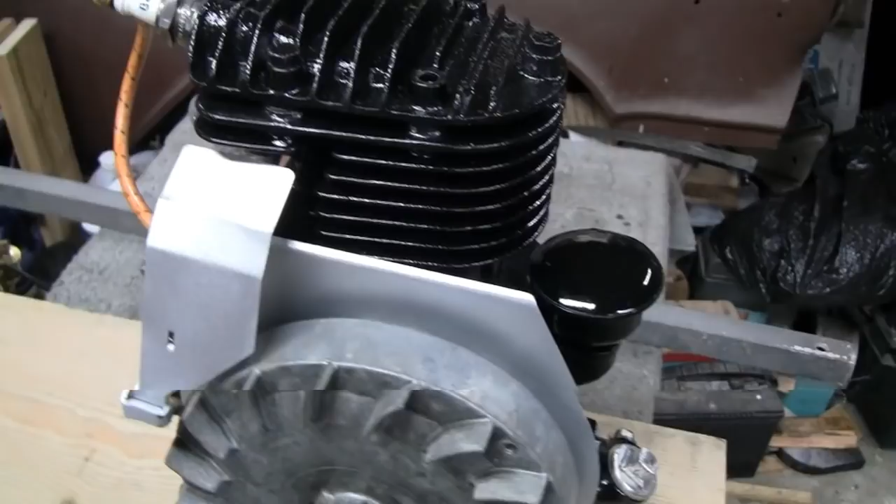Alright, working on the old 1936 Y model Briggs here. Where we left off we had everything together, and we're trying to figure out the Kickstarter. I think we figured out how that works. We'll get into that a little more later.

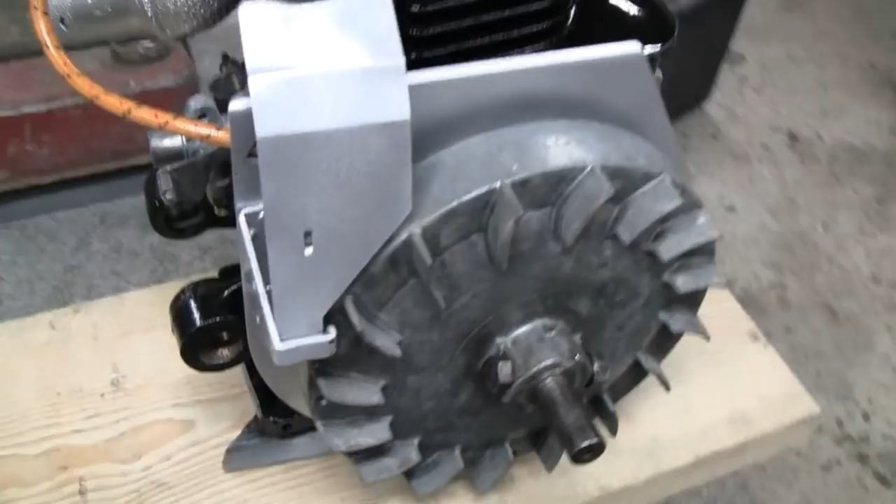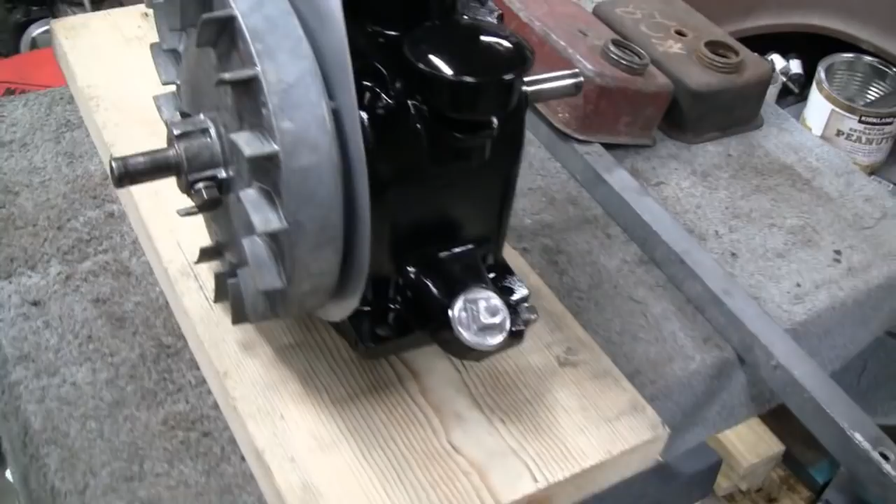Right now I needed to get a board to mount it on, and me and Mike were just on a road trip to Indiana, and one of our friends had some cherry wood. He's gonna give me cherry to put it on, but that just would have been way too nice for this.

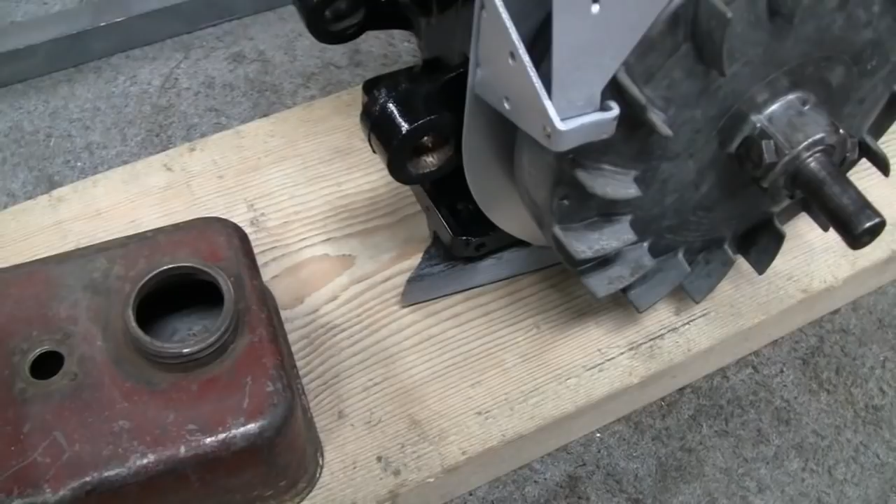But he had this nice piece of pine, so we're gonna mount it on this pine. And we also need a gas tank, and I was able to find this in the shed, but it's pretty rough.

I don't know if you see the bottom here. It's got all kinds of solder, all cobbled up and stuff, so it must have leaked at one time, and I don't know if it still leaks.

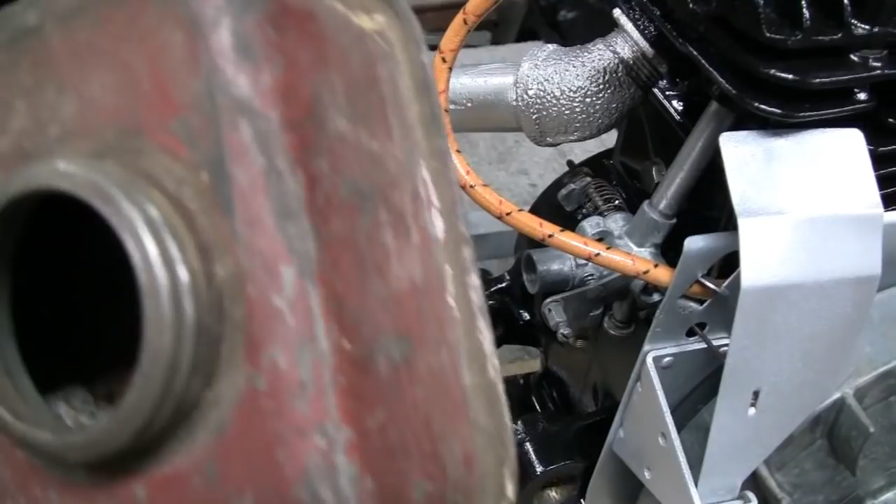It's funny because the inside, let me put the light on here, the inside of this looks pretty good. You see there's no rust at all down around there, except maybe around the edges, and then down here you see a little bit.

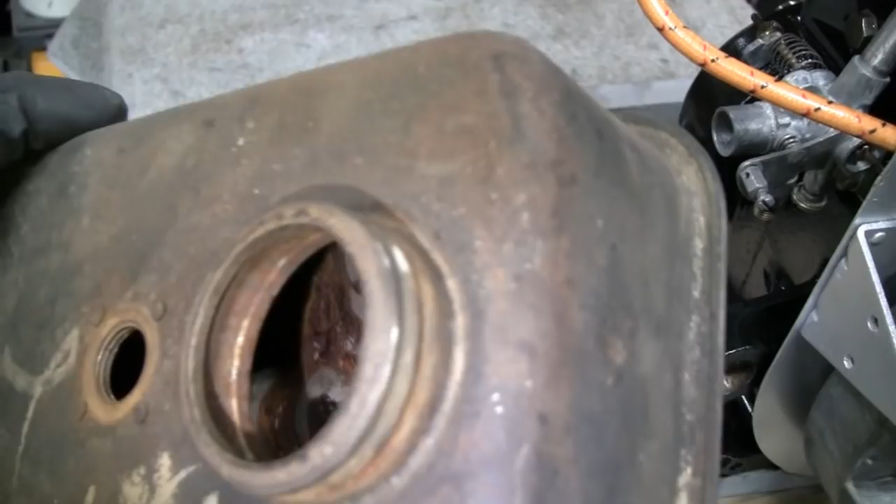I found another one up there too in the loft, and the inside of this one's not bad. I mean, it has rust, but somebody did solder down here and then along the side here. Matter of fact, it looks like they might even braze some of it.

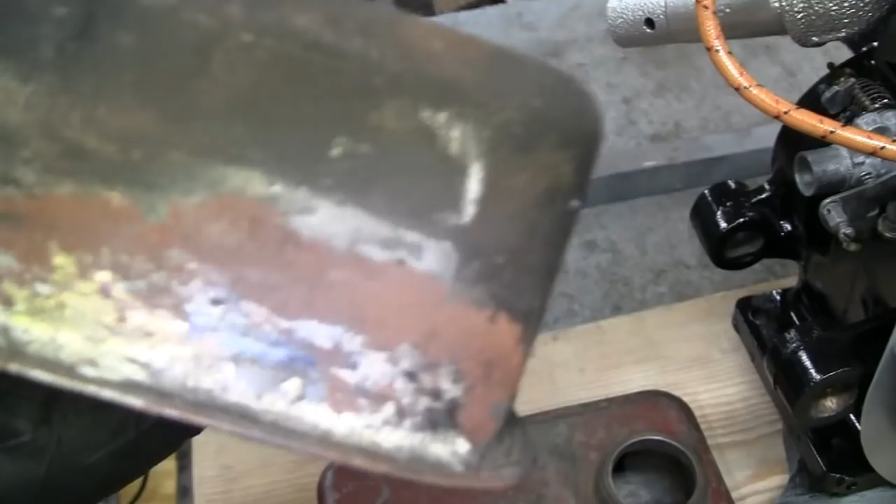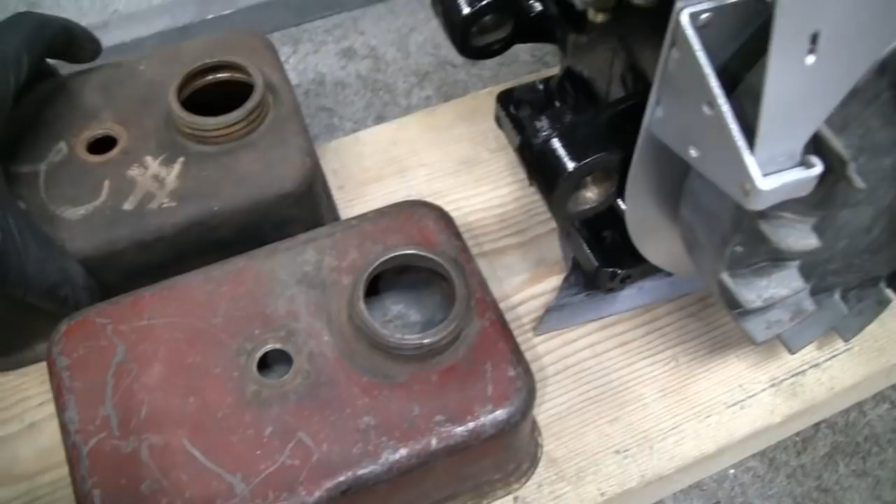So I'm going to see if these leak. If not, you know, whenever I'm at a show, I always, if I see one of these, I'll pick them up, because they're getting scarcer. I'm having trouble finding them.

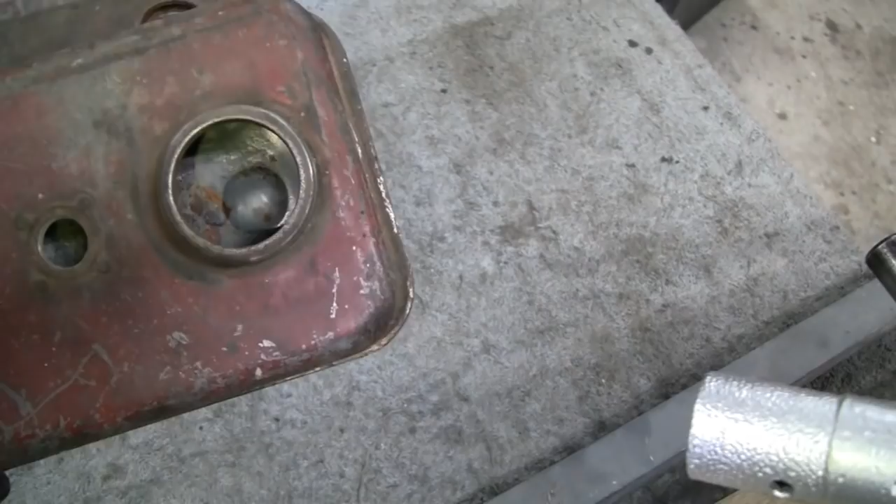You know, you can buy them. Somebody reproduces these, but it's like $70, and then by the time you're done shipping and everything, it's $75, and it just isn't worth it. I mean, half the time you can get the whole engine for 20, 25 bucks.

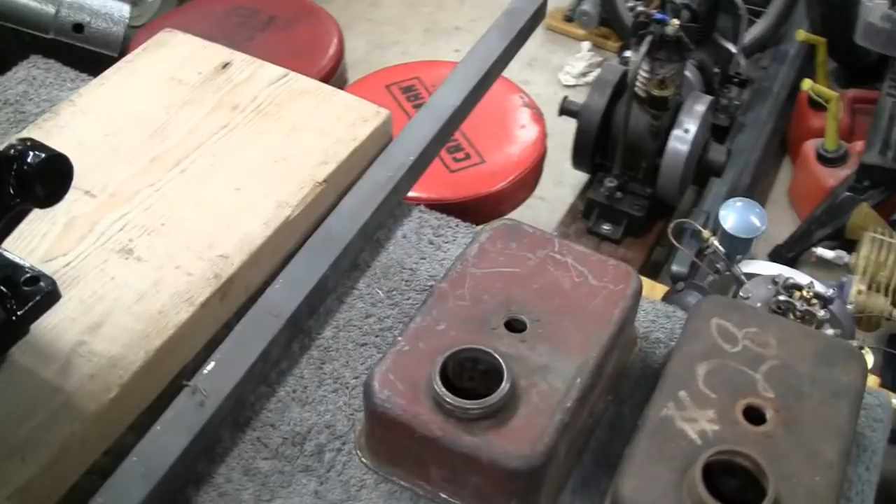The little WMs use these, and WIs, and a lot of the other engines use them. Matter of fact, that one there, we got one on there.

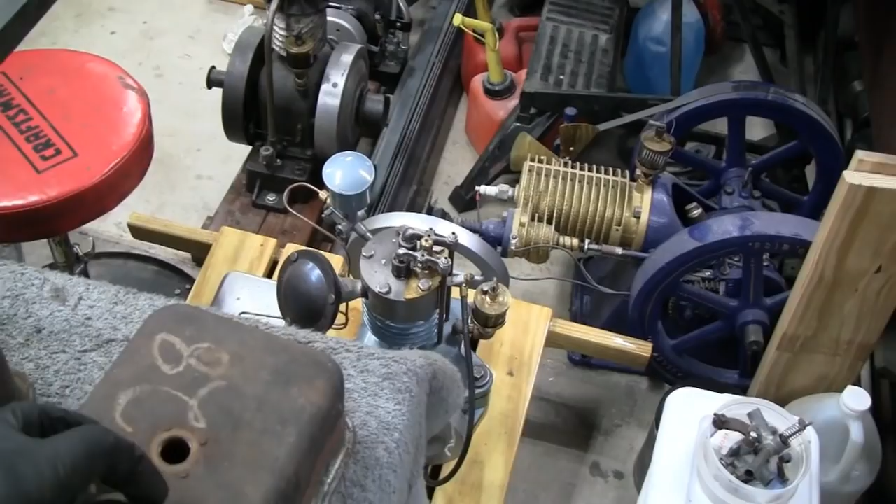Without the shows this year, I haven't been able to find any of these. So if there's anybody out there has this kind of tanks laying around, and they'd like to donate to the cause, get hold of me. Even the check valves, you know, they're tough to find, although they are available.

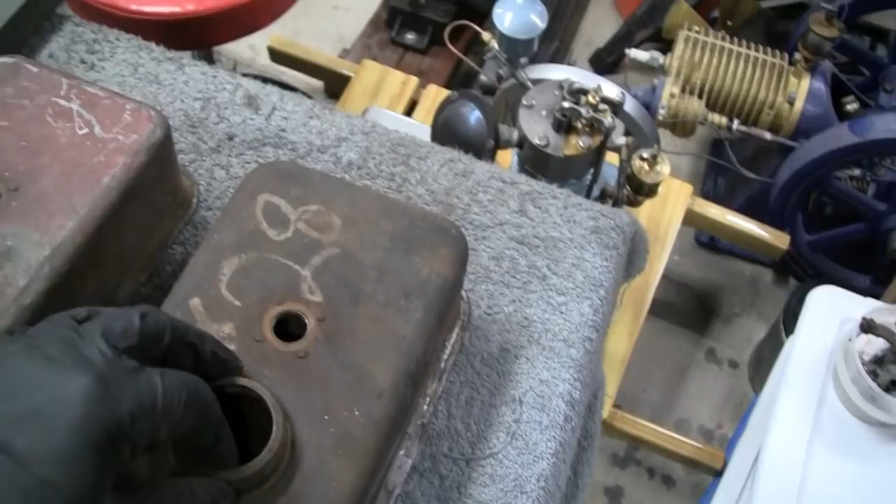But anyway, let's stop talking. Let's put some water in these. I know people say put alcohol in them and stuff like that, but I'm going to put water in them, and if water leaks out, then that means they got a leak. Let me get this off the bench here, and we'll set these up on some paper towels. That way we'll know if anything's coming out of them.

Alright, I filled both of these with water, and surprisingly, I don't see any leaks yet. That's crazy. Got a good bit of water in there too. I don't know if you guys see it, going to the top. Same with this one, so there's a good bit of water in there.

I'm going to let them sit for a while and work on something else, and then come back to this. I don't know how long I'm going to leave it, but hopefully nothing's leaking, and then I won't have to put a bottom in or anything like that.

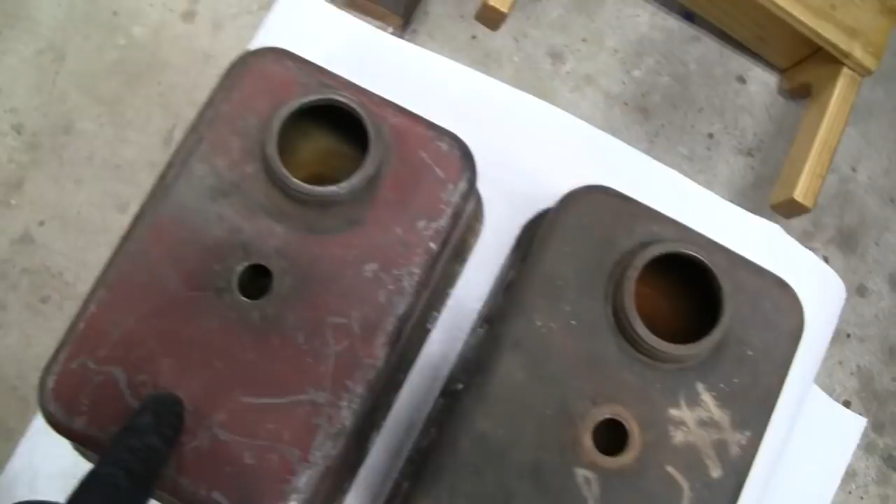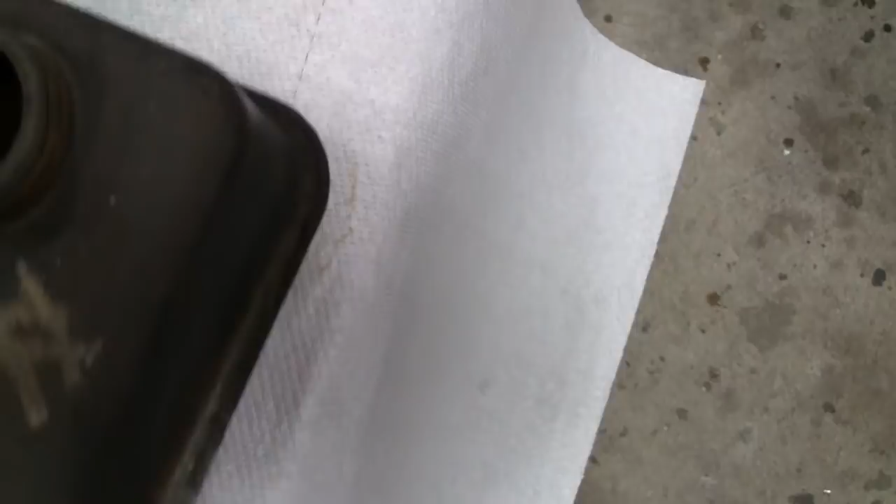And this one here, it actually has a little leak. I don't know if you can see it right there, there's a little stain. And like I say, it's been 3 days, but a leak is a leak. So at least I know I have to fix that one.

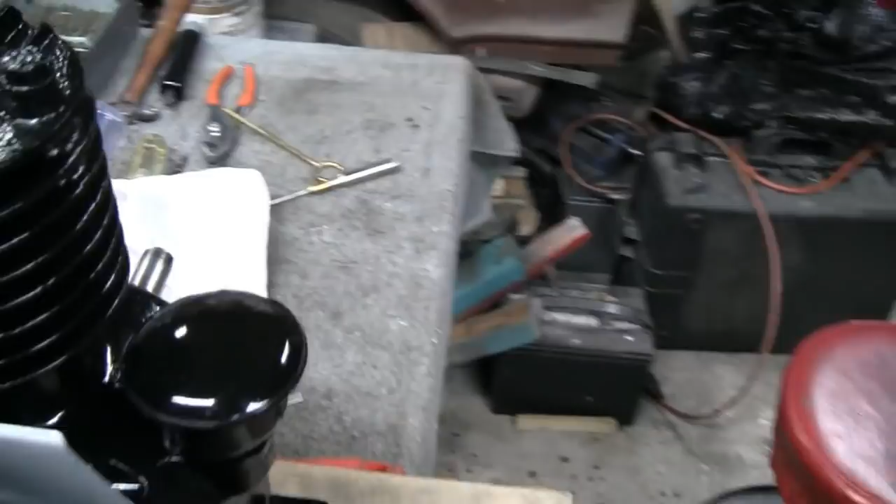For now, I'm going to empty this out and blow it out. I've got a couple hours of daylight left, so I might take it out and paint it. I think I'm going to paint it silver, only because this is going to have so much black—the engine's black, the housing's black—so I might try to paint this, even if it's by brush, just silver to give it a little contrast. So that's what we're going to do, I'm going to take it out and paint it.

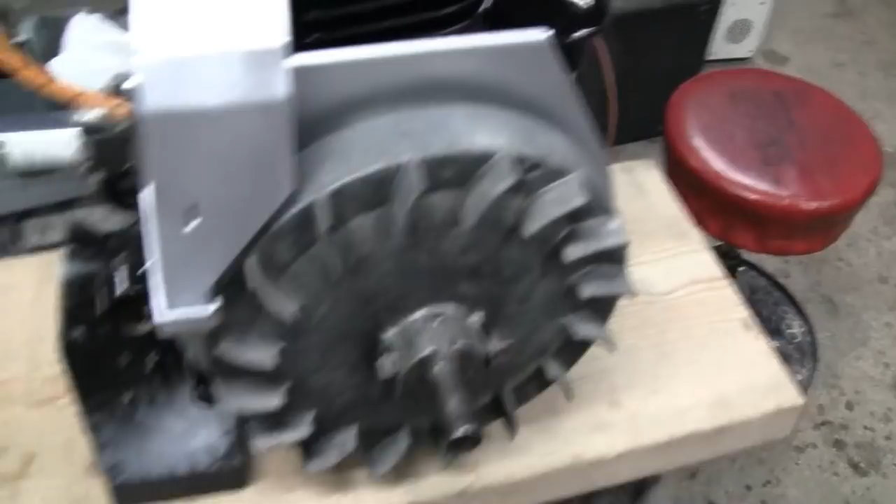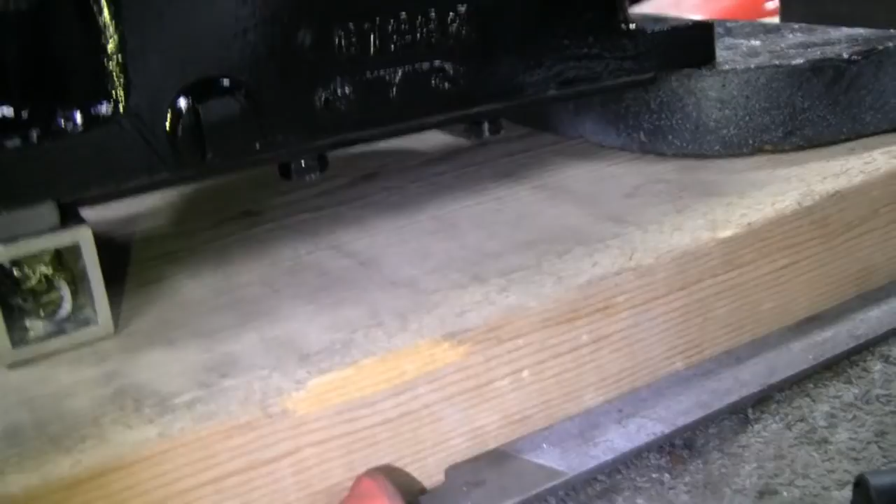Meanwhile, I was working on mounting this on the board. I was going to make a cutout for the shroud, but then it would sit low and I'm thinking it just wouldn't look right. Even when these things came out, they actually had feet that elevated them—they don't sit flat like your normal Briggs. They've got the bolts down here, so what I'm going to do is make this offset. I had some square aluminum and a piece of, I guess, quarter inch—like 3/16 or quarter inch steel.

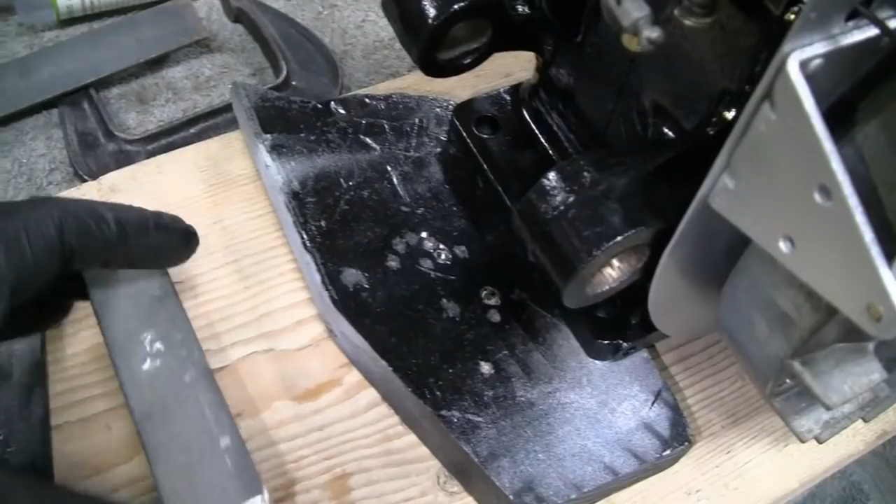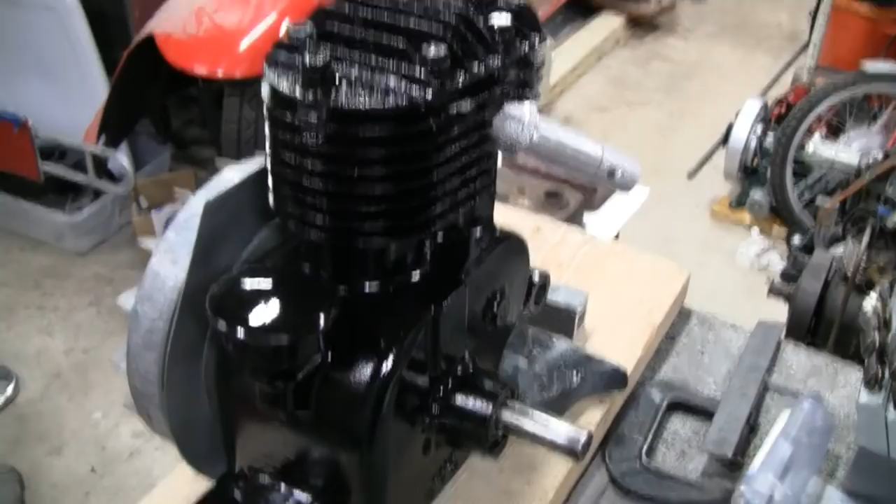That's going to lift this up enough so I can mount and center this, and it'll look okay. I already drilled the holes on one side, and now I have to drill these to quarter inch. This looks like maybe a 1 inch square aluminum block, and I think I might take the paint off of that and keep the aluminum—that'll give this a little more silver. So that's what I'm going to do, and we'll see when I get back. And then we have a little something to talk about.

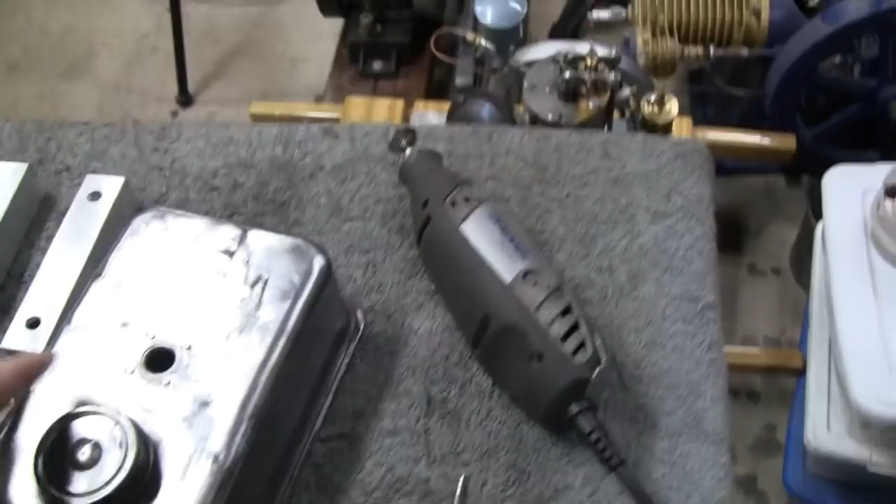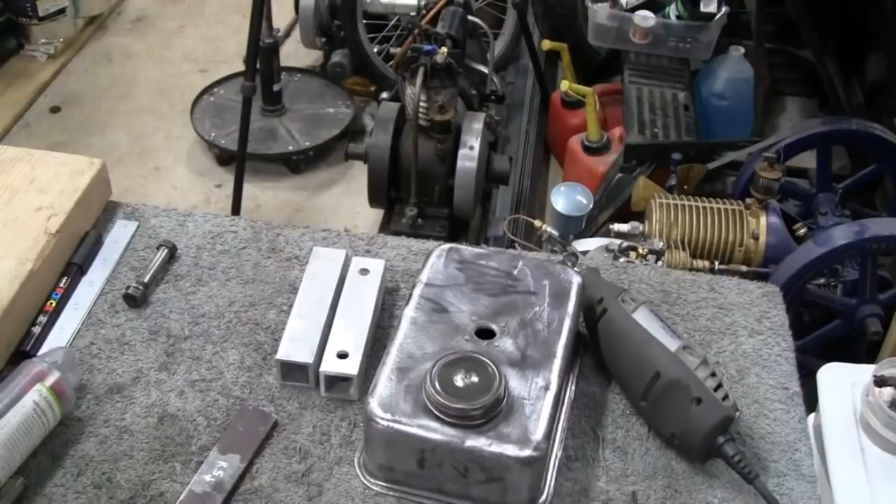Alright, yeah, I never did get outside to paint this. It took me a little longer than I thought to clean it up—I wanted to wire wheel that, clean them up, so it took a little longer. It's just one of those things. Right now it's dark out, so we'll get to that tomorrow.

There's no problem, but I came across something interesting. I'm going to point it out to you guys, but let me take this flywheel off and I'll show you. I think you'll like it. Let me clean this bench off here first, and then I'll show you.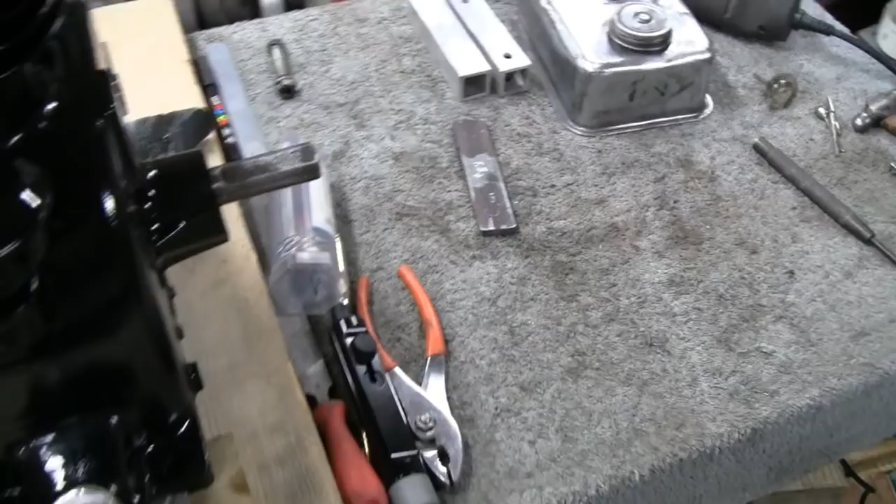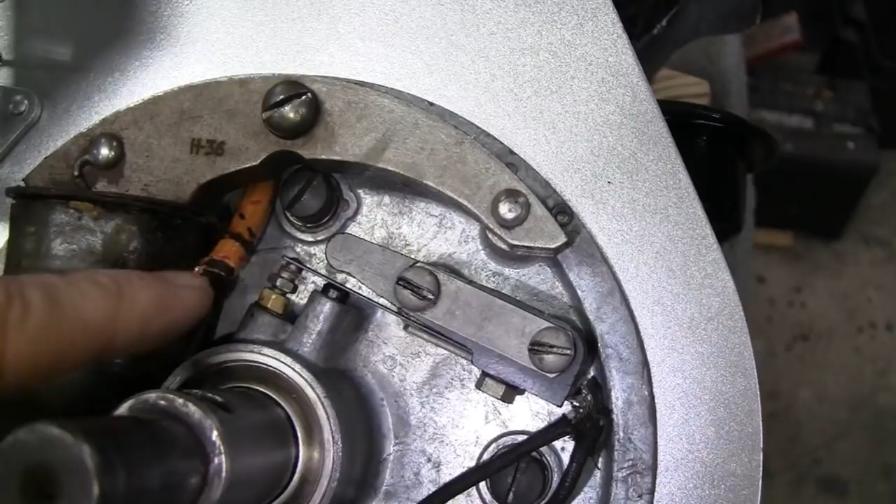Alright, I took the flywheel off there, and if you guys remember when we first took this engine apart—put the light on here, that might help—there you go. When we first took this engine apart, you remember, there was tar around this. This is the plug wire coming in, and there was tar around this, and I said I've never seen that before. I also said the wire should be crimped on, and after we took all the tar off, it was actually soldered on.

I said I'm pretty sure it's not supposed to be soldered. I looked into it a little bit, because most of them—I've never seen a Briggs that had the wire soldered on—and I said I'm not sure, I don't think it's supposed to be like that, but to me it looked factory. So I looked into it a little bit, and let me show you what I came up with.

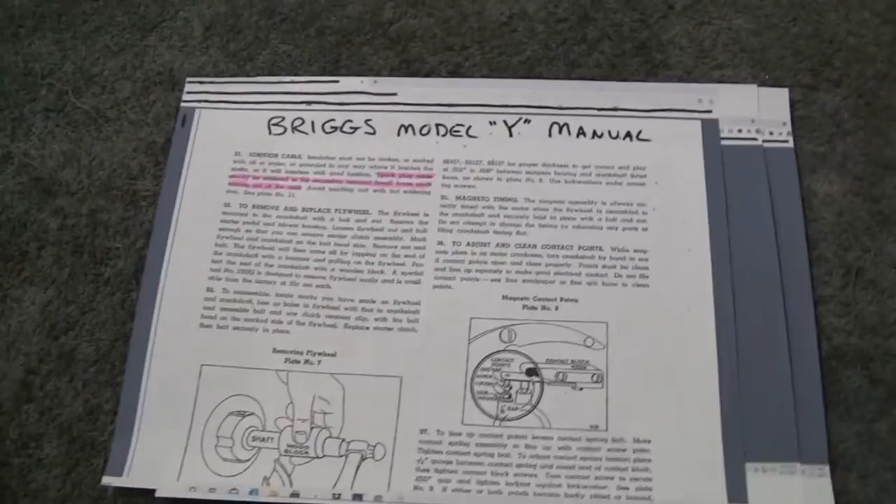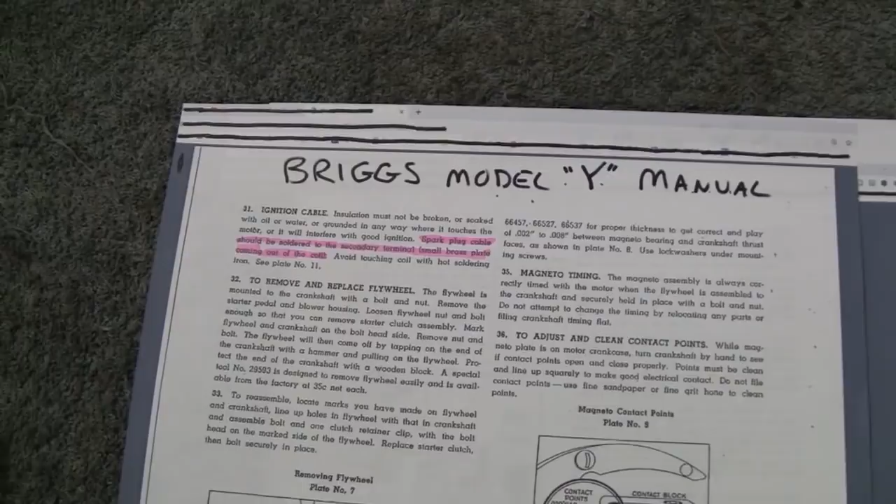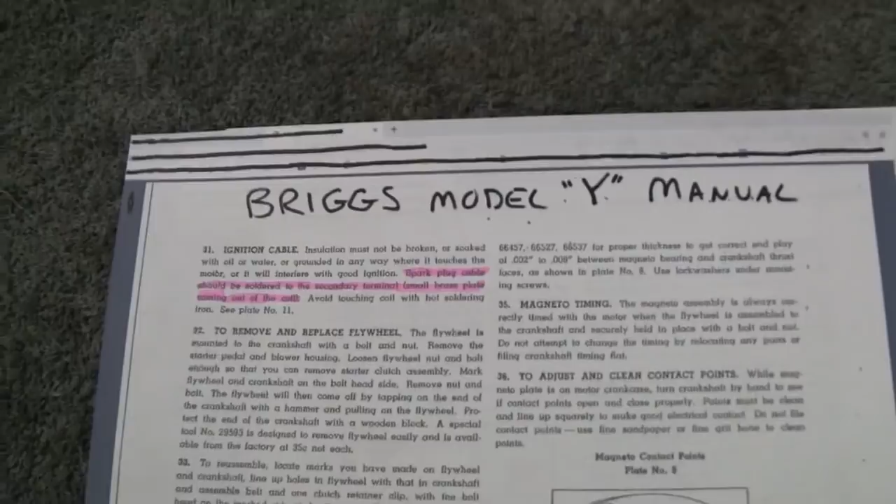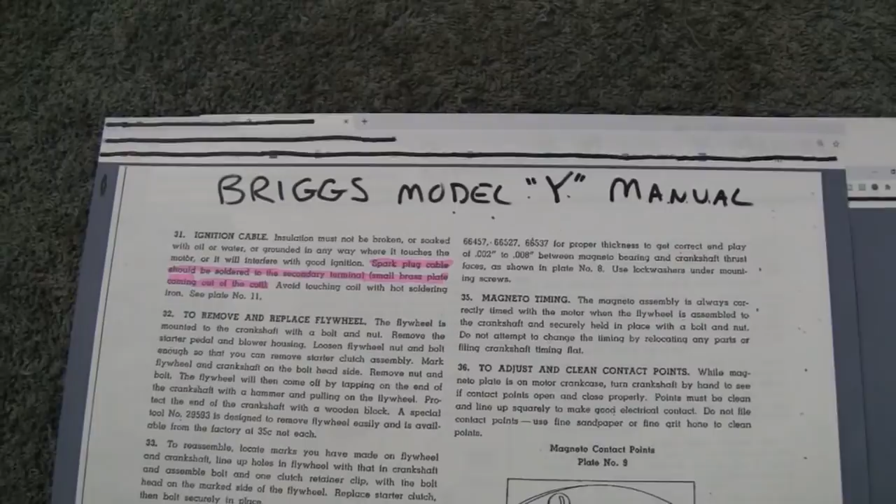Alright, check this out. I copied this directly from the Briggs Model Y manual. One of Mike's subscribers contacted him and brought this to his attention, and he sent it to me. I don't know which subscriber that was, but I want to thank him—you know who you are. Remember, these were washing machine engines, so they're pretty unique. In later years they did put them on lawnmowers, but for the most part they were built and designed for washing machines.

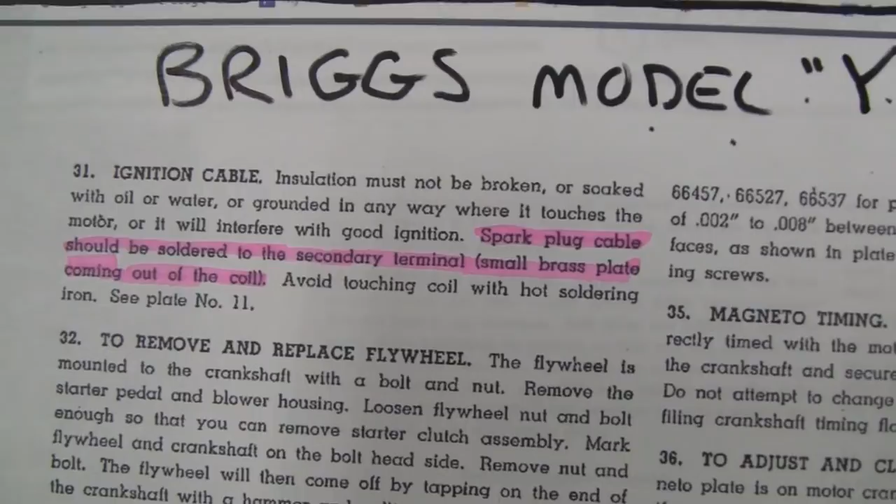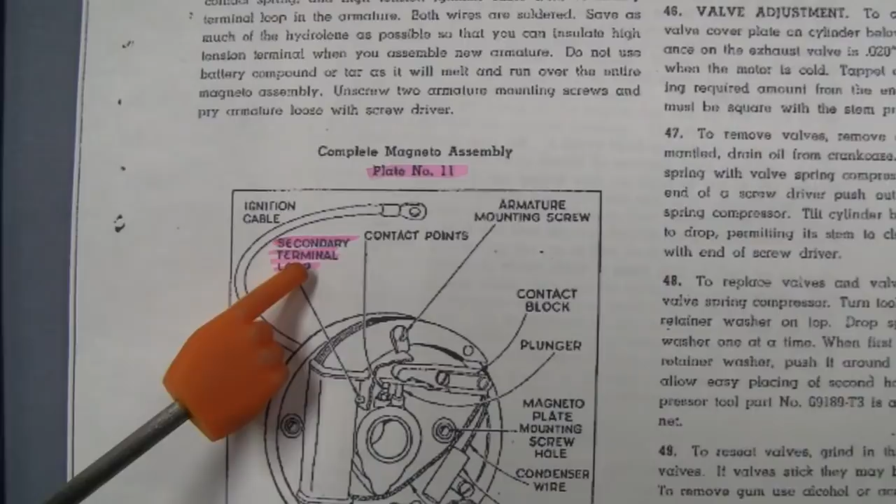So let me zoom in here, and right here, read what it says: spark plug cable should be soldered to the secondary terminal—it's a small brass plate coming out of the coil. Then it tells you, down here it says don't touch the hot soldering iron to the coil. And then it says see plate 11. So let's move this out of the way—and here's plate 11, here's the secondary coil, and here's the little tab.

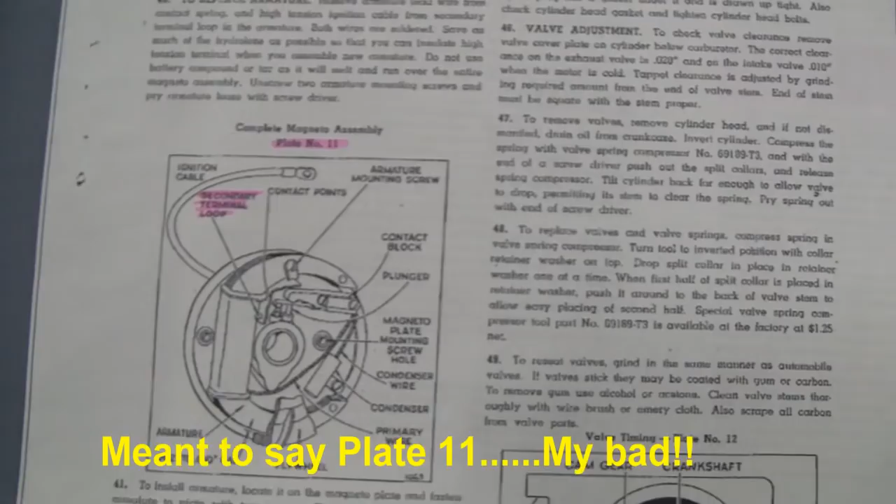So you guys know exactly what it is, that's the Model Y. Now the Model FH, this here I took out of the Model FH manual. The coils are identical in every way, they just mount differently. Read what this is, something different right here.

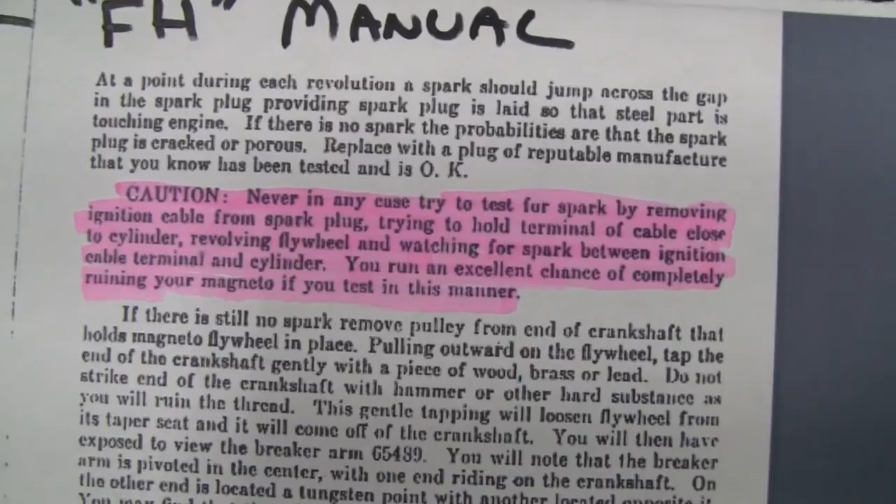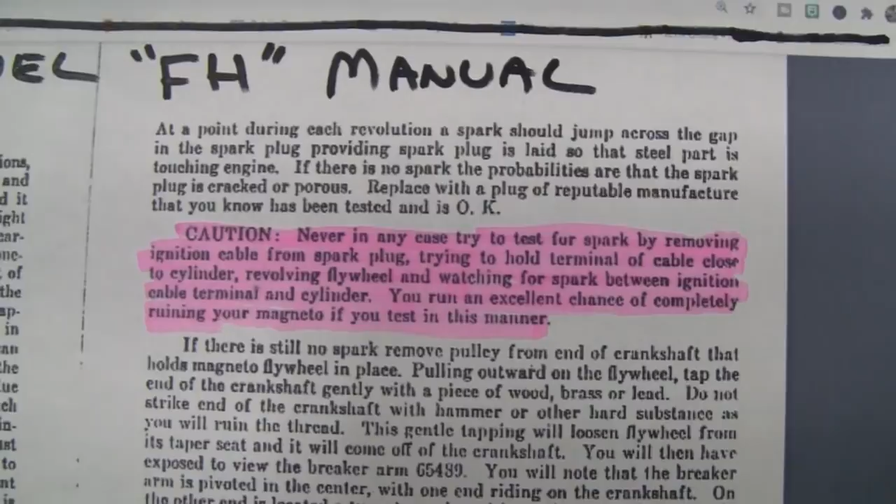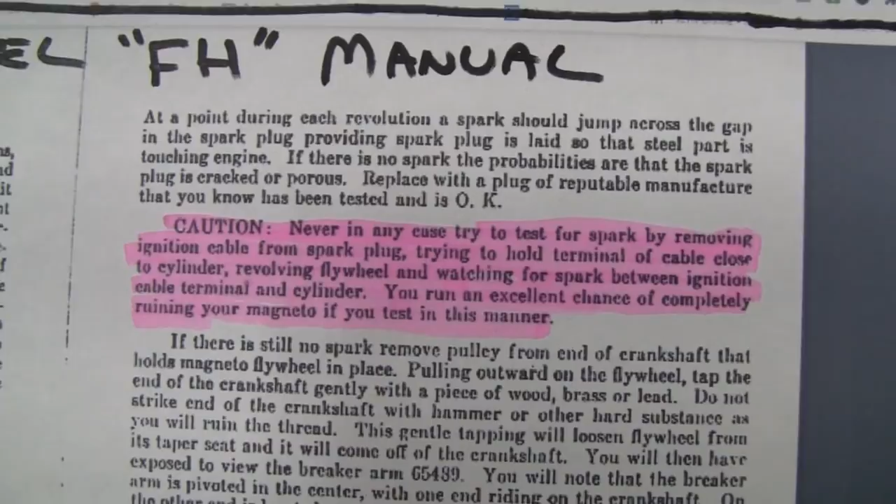This here, you know the way people check for a spark, let me zoom in and you can read that. I'll give you an idea what it says. They're telling you don't take the cable off the spark plug and put it against the engine, like hold it off the engine and spin the crank to see if you get a spark. They tell you don't do that because you get an excellent chance of completely ruining your magneto if you test it that way. But anyway, that's a little off to the side there for you.

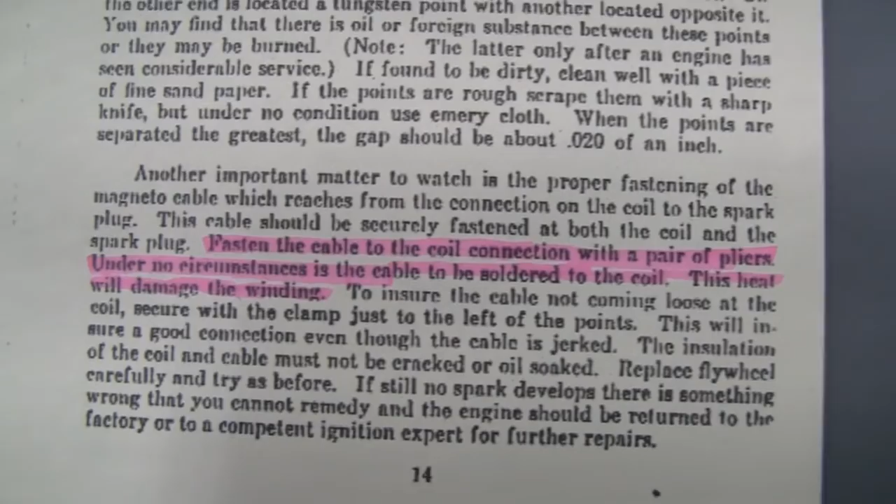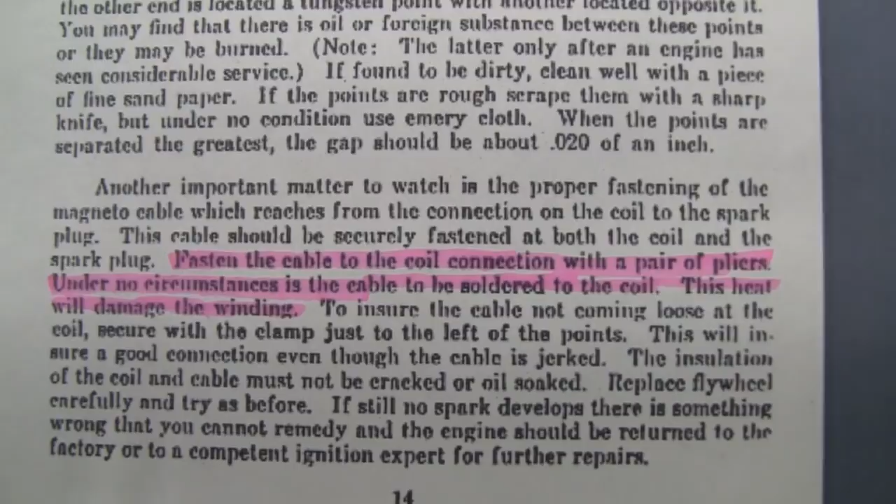But read this, this is about the coil. Like I say, this came directly from the Model FH manual, which is identical to the other coil. Check out, read what this says here, right here. It says fasten the coil connection with a pair of pliers. Under no circumstance is that cable to be soldered to the coil. The heat will damage the windings.

And that's what I was always taught, and that's what I always believed. Even Maytags are all crimped on, so I thought that would be interesting, because when you ask people that, you talk to certain people and they say oh no, you're supposed to solder that. Then you talk to other people, not supposed to solder it, and you don't know who to believe, but when you see it in the manuals, you know what to believe.

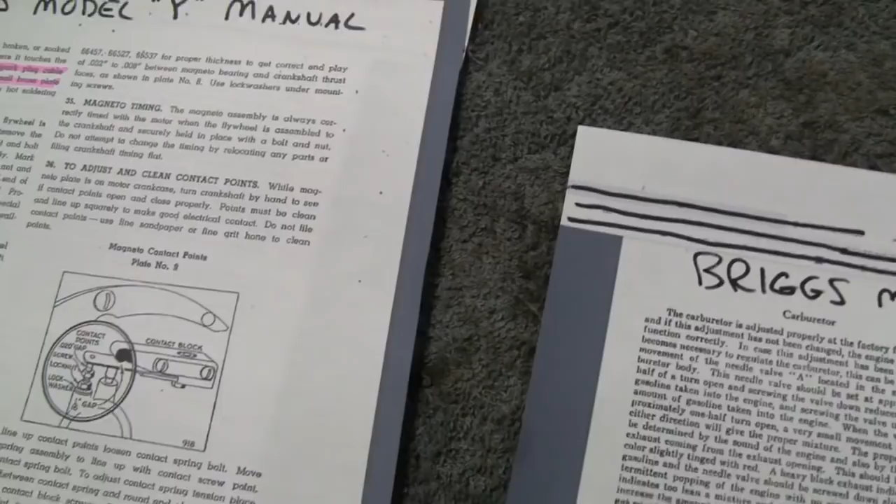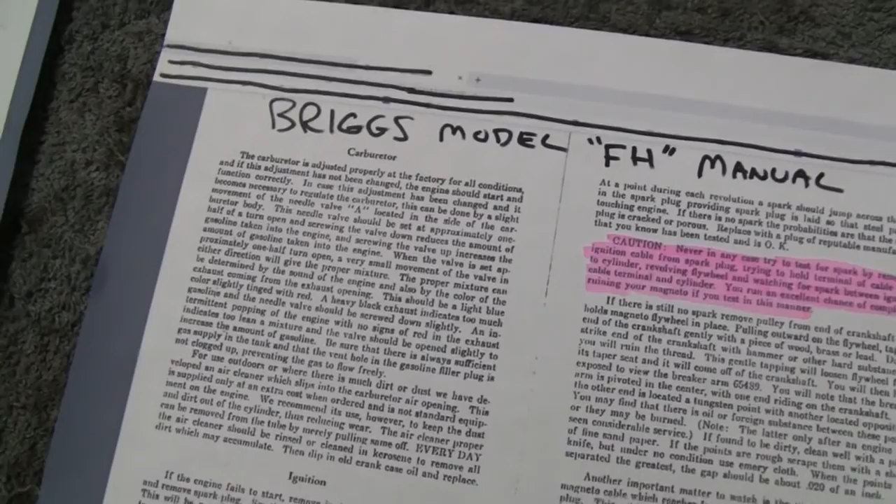But in this case, Briggs tells you to do it both ways. So what the heck are you supposed to, who are you even supposed to believe? But anyway, like I say, that's specifically for the Y, which is a wash machine engine, and I'm never going to use this for a wash machine, and I don't think it's ever going to be used on one. So I'm just going to crimp that on there and call it good.

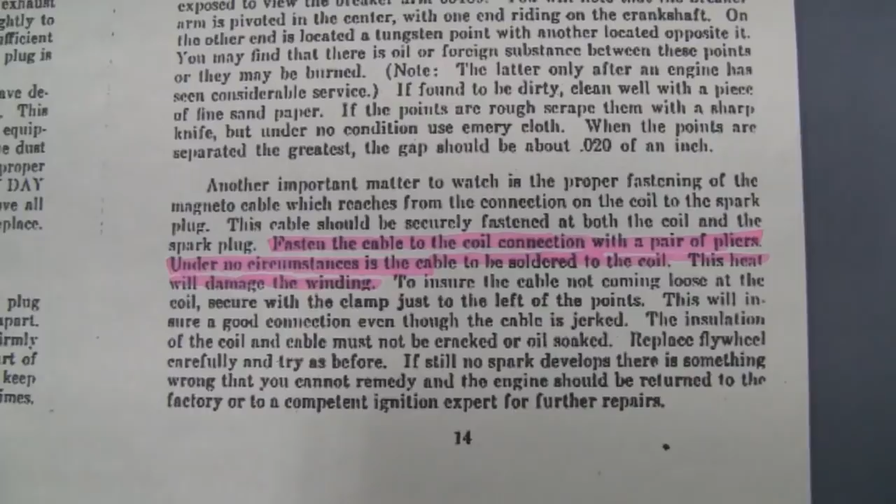Alright, it's the next day, and I've been pretty busy. I already primed and painted this, and it's already dry. Sanding down the mounting board here, just rounded the edges off, sanded it down, tried to give it a little bit of a finished look. You don't want to get too crazy with it. And that's the first coat, so that's got to soak in, and then I got to give it about 3 more coats. But that's it, I'm pretty much at a standstill now till all this stuff dries.

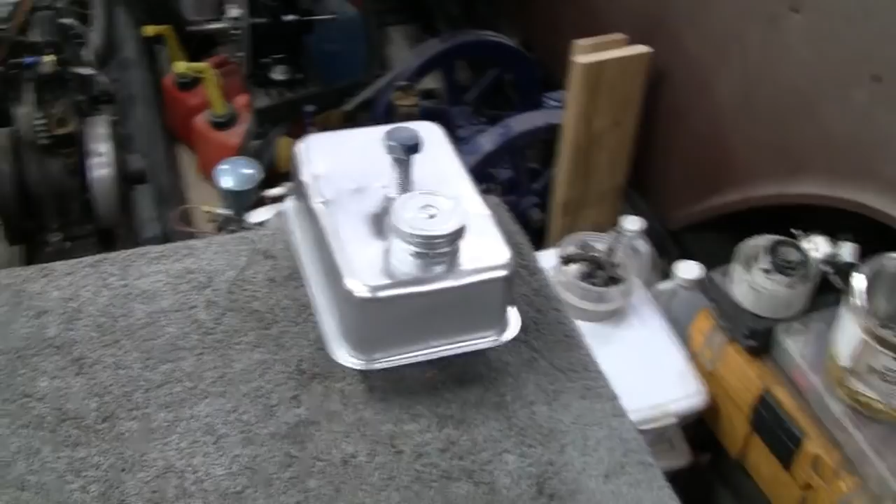And you know what, I got a few minutes, let me show you something pretty interesting. Let me grab this here. I just got this in the mail the other day from one of my friends on YouTube there. Not only is he a friend of the channel, but he's a personal friend, I see him at all shows. And 357 Magdad, he's got a good channel over there, and he sent me this. Let me get this out of the way here.

He sent me this here. You know, I'm getting back into upholstery, I have about 2 or 3 pieces like a chair, and I got to do the truck and everything, so I got some upholstery work I got to do. And what he does on his channel, he restores tools and stuff. He had restored this a while ago, I guess 6 months ago, and then it just popped up on his channel again. And I had asked him if he'd be interested in parting with it, and he said sure, no problem. But what's interesting about it, let me pull up a chair here.

Oh sorry about that, it was a little too far away. But what's interesting about this, I even wrote some notes down about it. He couldn't find any information about it, it's a local tool, and I was able to find a little more about it. It's a tack puller, you just stick this in like upholstery, stick it under there, and just pop the tacks up.

But he probably didn't know the real story. I told him what it was, but he couldn't find any information at the time. Take a look at the shape of this tool, it's pretty good. Matter of fact, he restored this. This thing was a mess when he got it. He redefined all the little indentations, put a nice rosewood finish on it, took off all the rust and polished it up, did a really beautiful job. By looking at it, you'd never know, but it's almost 190 years old.